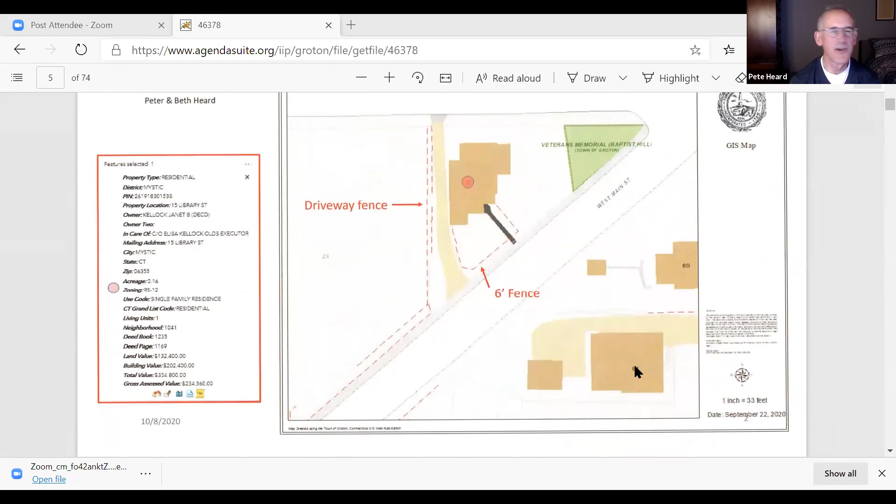What we're looking to do is remove the rotted fence that's along roughly 90 feet on the west side of the driveway along the property edge. The purpose is to access and remove the vegetation that's growing between the fence and the concrete wall that runs along the property line. I'm guessing the fence is 25, 30 years old. I don't believe it has any historical significance, and it's largely hidden from public view. It's perpendicular to both Route 1 and Library Street. As I said, behind the fence is a concrete wall that you probably all know about. It separates our property from the house that's being renovated next door.

And in the spring, what we'll want to do is something there, we're not quite sure what. We'll look for your guidance on that, but we're going to regrade the driveway a little bit, add some gravel to level the ditch that's behind the fence, between the fence and the concrete wall. We may put in a new fence there, but we want a few winter months to visualize what we're going to do there in the future. Again, the main purpose now is to get the vegetation down. It's overgrowing the house, filling the gutters and so forth. And the fence is rotted anyway, I think it needs to come down regardless.

The other part of the project is to remove the fence that runs partially along the driveway towards Route 1, then turns the corner and goes down Route 1 about 30, 35 feet or so. It's a 6-foot fence, a little bit newer, certainly in better condition. But I think at 6 feet, it's out of character for the neighborhood. We want to take that down, plant arborvitaes along Route 1, and possibly around the corner lining the driveway. Again, not quite sure what we're going to do there. We understand Route 1 is scheduled to be redone in 2021 or 22, some trees being taken down and the Jersey barriers there. So we're not sure if that's going to come onto the sidewalk property, but we'll come back to you if we put up a new fence there, a 4-foot fence along Route 1. So that's it in a nutshell, glad to answer questions.

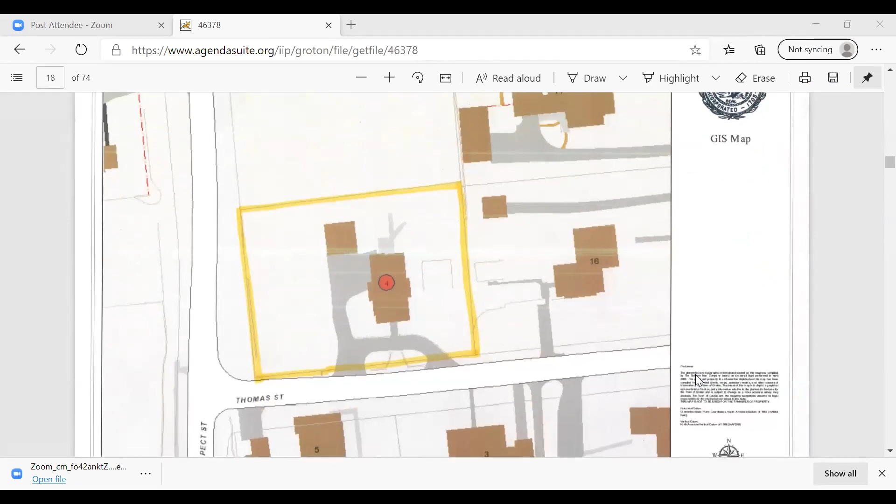Can you hear me? Yes, okay. We want to replace 21 windows in the front of the house and the side of the house. The back was done in 2005 when they put an addition on the house, and the original windows are the windows we want to replace. We want to put in replacement windows because we don't want to tear any of the trim inside the house apart, because we had a problem when we did some flooring.

They broke a piece of trim and you couldn't replace it, so we just want to put replacement windows in. They're solid wood windows with aluminum clad, the exact same windows as the back of the house. They're going to take the 21 windows off, take them out, put the new windows in, caulk, and seal everything.

Now, do you have storm windows on there? Yes, they're aluminum storm windows, which will be disposed of. You're going to remove those. Yes, so you will only see the windows - there will not be any storm windows whatsoever, because all of the windows are double paned. Right, they're thermal pane.

And what's the muntin situation of those windows? Are they 1/1s? 2/1s and 1/1s, it says, right? Oh, it's 2 on the top, 1 on the bottom - exactly what is the rest of the house. So wherever you're replacing a window, you're replacing it with a like window? The same, it'll look exactly the same. Okay.

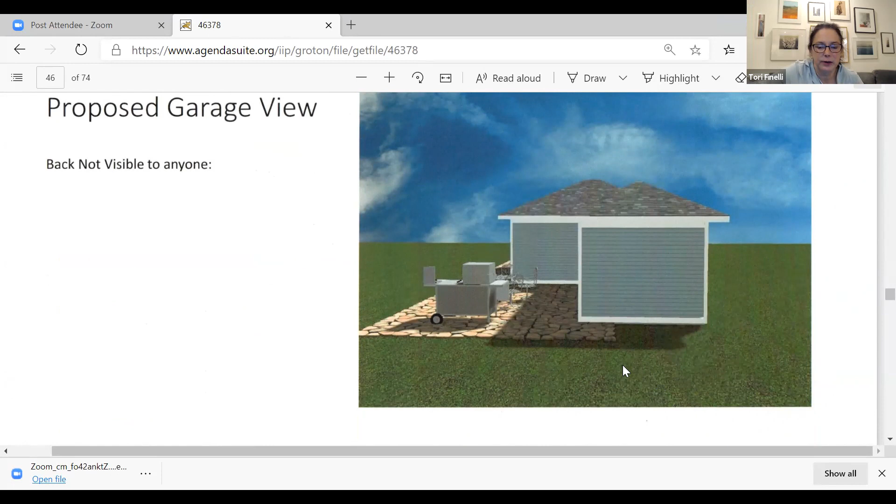This isn't visible to anybody, correct? Well, yeah, because my neighbor's garage is right up against it - you could walk, there's like 3 feet in between. But there's no change to that anyway, no windows or. And it's not visible from a public way anywhere either, right? It's not visible from the street.

And that's - sorry, my internet's not too good. That's one of them.

So we're doing the 2/2, what it's called - 2 wide, 1 high, which is what the rest of the house has and what there is on the garage right now. But it'll be...

It did sign out. It didn't - what did it do? What do I do? What did I do with the Chinese food?

So it won't be an actual divided light, it's simulated divided light, but it's on the inside and outside. So it'll look like the existing window right there - shut the volume - as will the door. Can't hear you. Does it not hear you? I can hear somebody's TV. Please shut the volume down, please.

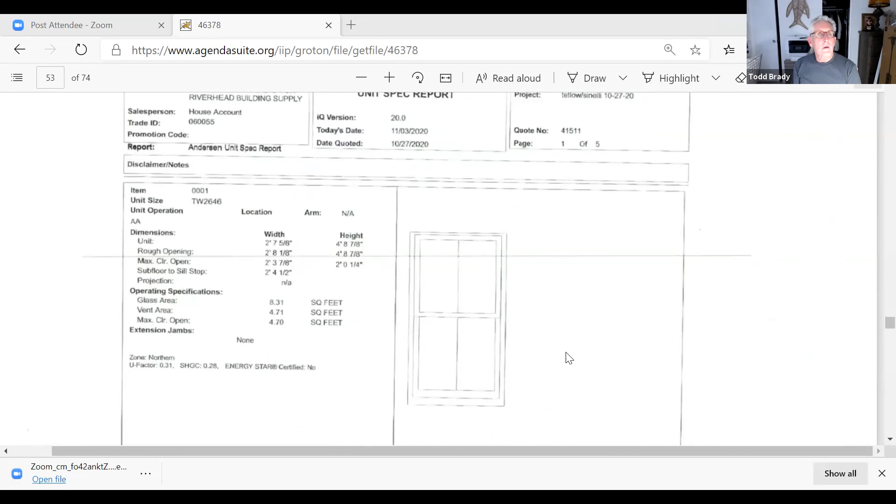It's not within our jurisdiction, but I'm just curious - if you're gonna make it living space, doesn't it have to be insulated and everything? Yeah, they're gonna do that on the inside. Because right now it's just open wood on the inside. So they're gonna insulate it and put - what, drywall? Drywall, yeah, okay.

So you're not doing anything to the siding? Doing the faux garage doors - no, that's all just the wood siding, which will stay the same. In the back where we're raising it, we're just gonna copy the same wood siding and paint it the same. We painted it since we've moved in, so it'll all match. And then the roof is just shingle, not old, so that's easy to match.

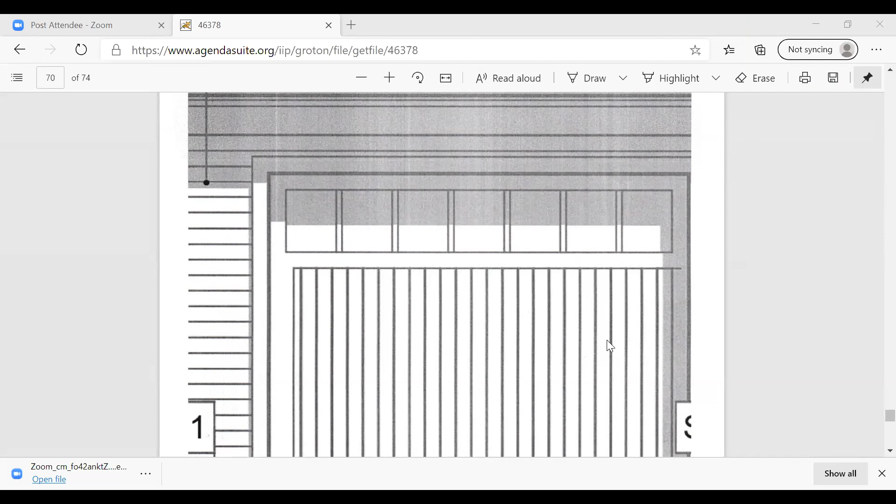Was this for pre-application? This is for Broadway. It's going to be Station 1 Hotel. Wrong side of the river. Oh, I think you're here for that house. Yeah, oh, for the one behind it. Yes, for Perry Lorenz's house. Sorry, my apologies, right on Fort Rachel Place. Yes, correct. All right, we'll get back to you if Mr. Camo gets here.

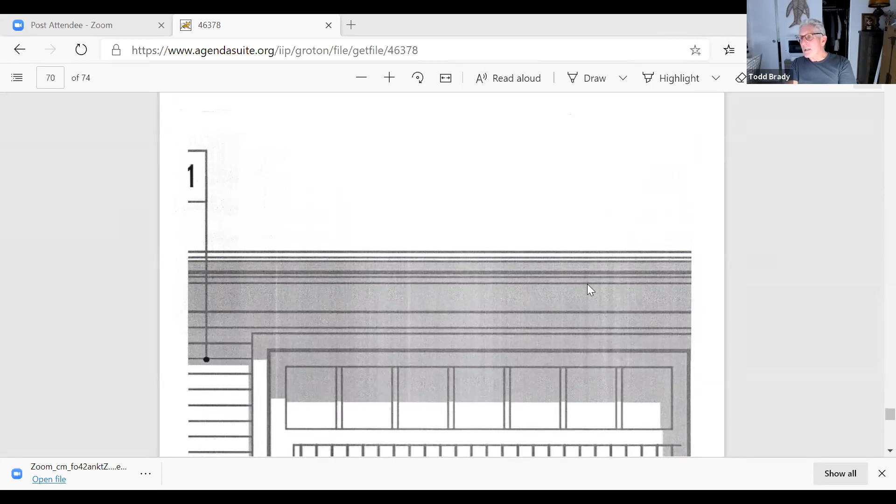In the meantime, do we have to vote on this, or is this just a submission? I think it was just a submission because you guys agreed as long as he submitted for you to review briefly. Okay, so this is the garage door he's gonna use.

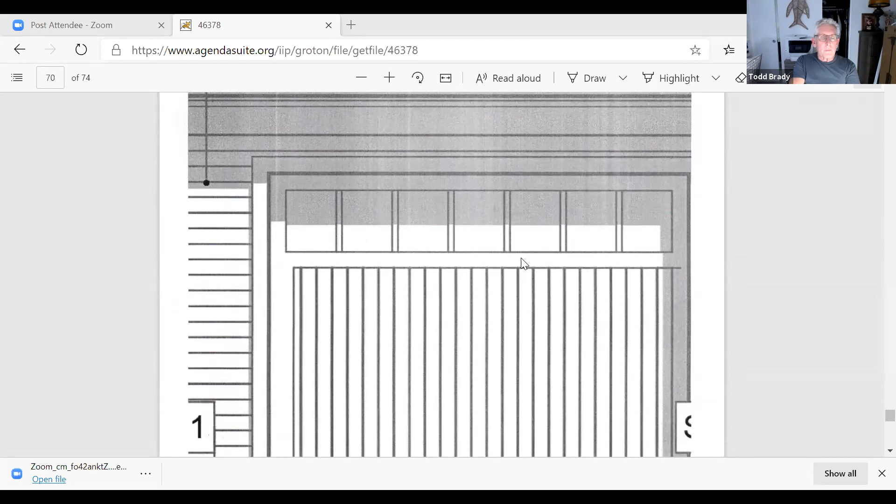Is there anything below that, Peter? Right there. What is that? And that's it, it's just showing the grid style. Is that the door he's using, or is that the door he's using? Yeah, those are two different doors. That's why I'm confused.

And the substituted garage door style. So the substituted one is this one, the one with the grid style. That's what he's going to use, Peter. Right, that's the substituted one. The one above is the one that we approved before that had glass. So this is just a solid door. Okay, so I guess we just attach that to the file. I think that was a formality where somebody said you should just make sure you submit it. You guys were approving it, but you just wanted to see it in the packet.

I still don't see Mark Como out there. Can we go on to new business while we're waiting, Peter?

Might as well. So we were working on changing the application to make it a little bit more formal with the procedural aspect of it, so we don't run into the problems we were running into. This was the new format we were going to be using for the application. We wanted to bring this up for the commission to take a look at.

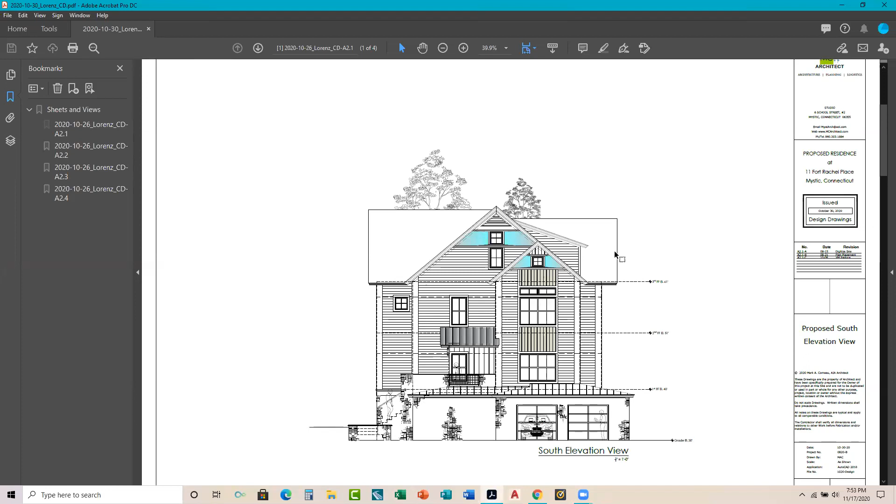So I had presented elevations in CAD of the proposed property, and I had expressed how we were using a very clean way of expressing very typical federal kind of details and modern farmhouse architecture on this structure. It navigates over four different levels of plane to get from the lower area at approximately elevation 28 up to elevation 55. In listening to Eric, I know he had concerns, which I believe were just about the nature of the CAD drawings - wide pilaster corners, typical traditional roof, metal roofing, standing seam metal, clapboard siding, double hung windows. I don't know where we can really go too wrong with those elements.

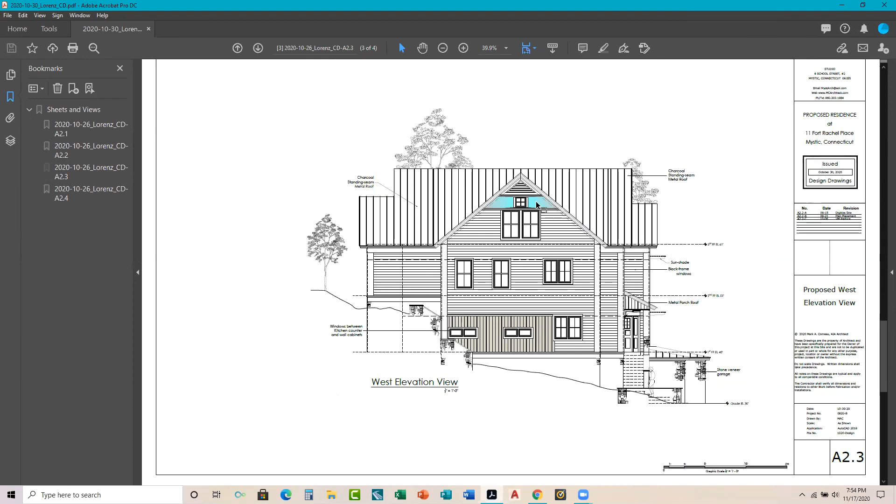But we're going to use a wider 15-inch, very plain pilastered corner. We could decorate it with moldings and all of that, but that's what they would have done 100 years ago. I'm looking to do more of an abstraction of the elements that truly are the creator of the forms

of Mystic, and move the dialogue a little further. And then within that, we've got the expressions of the fenestration, double hung windows, a charcoal frame, as you see on the Bravo building.

But I've broken it up in between them with a vertical wide plank shiplap, a plowed groove instead. It's a subtle detail that, if you know what shiplap is, only shows in a very thin shadow. But here I drafted it, and it shows up like a Yankee pinstripe, where you'd hardly ever see that. You'd probably hardly know the difference between this surface and this surface. Only when the sun hits it a certain way will you see any of the shadows communicating that.

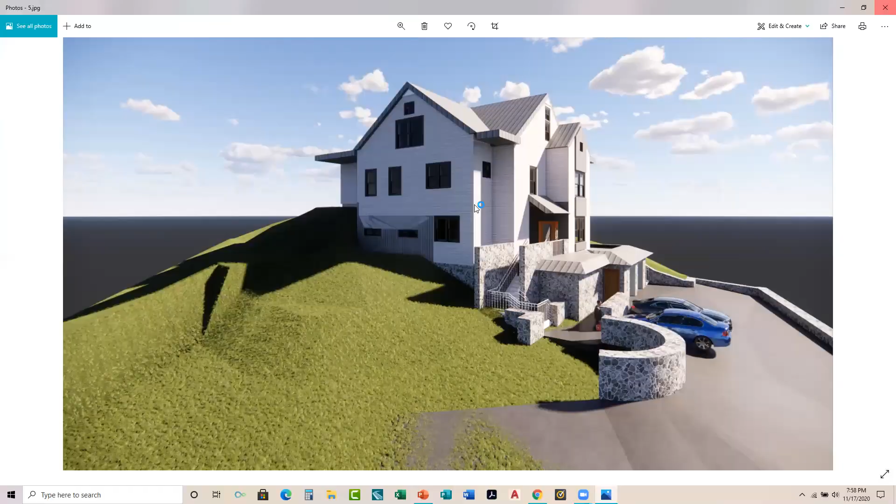This would be from the southeast corner. This green area, it's a very difficult site to model. This actually would drop off and be ledge that goes down to Water Street down here. So where we show this grassy field, it's obviously not there. But in the modeling, you've got to make do with what you do.

When you come in from Fort Rachel Place, you come up the drive and into the garage here, and this is that walkway that's going to make its way up to the main terrace and then up to the upper level terrace here.

The siding would be all white painted clapboard. We'd have this vertical shiplap exposed groove that would be just a little bit of a sandy color, just to accentuate itself a little off the clapboard. And then the charcoal roof, as you can see.

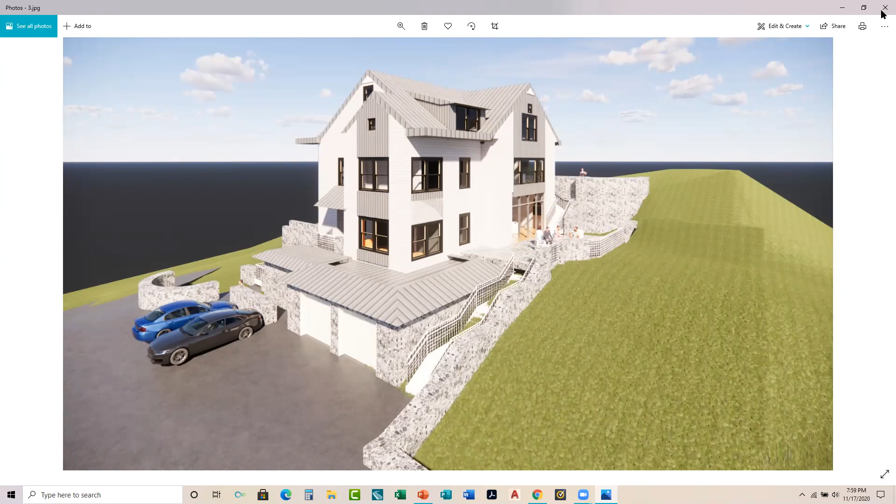And I've got a third one here, more from the east. These windows aren't really right, there's a mullion missing here in this. They're double hung windows, so it's double hung, double hung, double hung, double hung, all double hungs. And then we've got sliding doors here with transoms with muntins above.

So the models are very complicated and take a lot to really put together, but you all are professionals in what you do, and I know you can read into the progress of what you see here.

Mark, I have a question about the roof. Can you go back to that? To the model? Yeah.

So as I'm coming down the standing seam roof here, I'm looking at the gable end and the edge of the roof. It looks... I can't figure out exactly what's going on down here by the eave. Is that a vertical fascia?

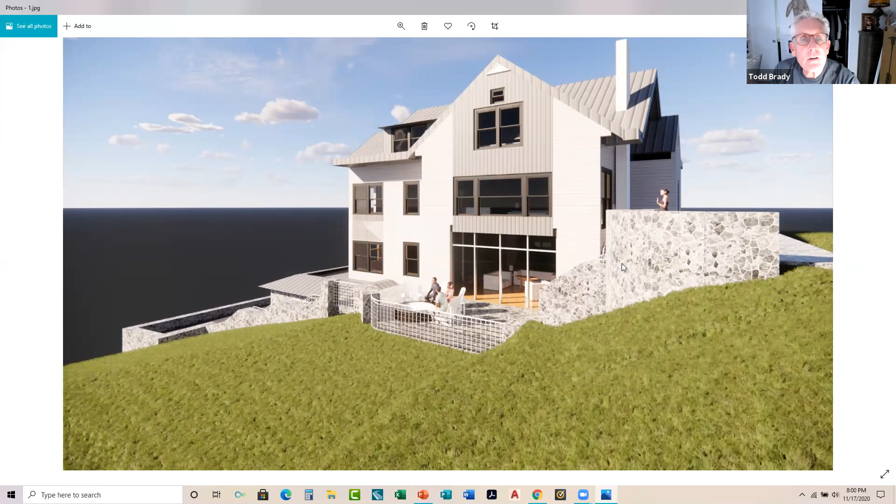No, that's just a function of having to adjust the model. If I go back to this, it's a very typical 8-inch fascia with probably a scotia molding right under the drip. Very typical New England fascia. We have a 20-inch overhang, which gives us a nice shadow line, and then the standing seam metal roof goes from there.

It makes it look like there's a fascia all the way around that's like a foot high. That's just... yep.

You're gonna clean that up if you do those drawings? Oh yeah, the cleaning up is easy. Building the basic model and getting the form there is 92% of the work. 8% is putting the icing on the cake, and that's where we're at right now. So we'll definitely be ready in 2 weeks. But obviously, this rendering you see in front of you wasn't done overnight.

These hand drawings take a while, but I wanted to produce this. I've been doing this for 30 years, and this is really more the texture and expression that this house will have, so I wanted to pay more attention to it. The modeling just simply shows you mass and shadow and context in ways that we can't in 2D.

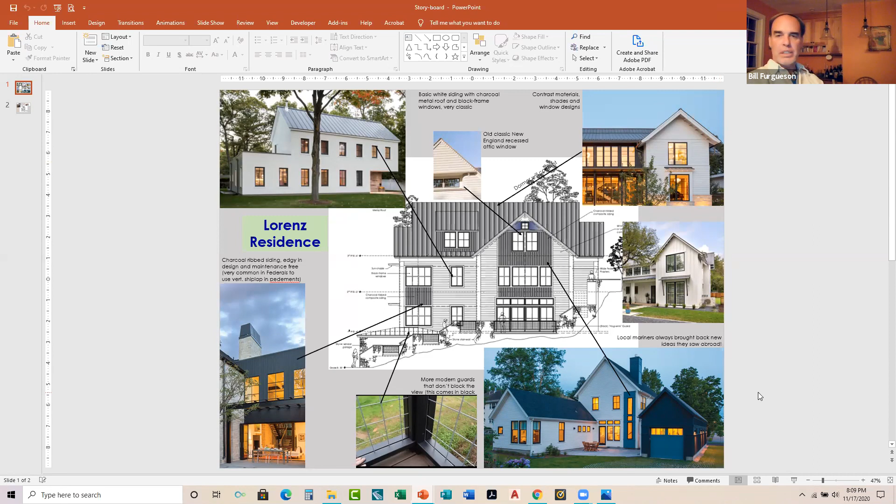One of the issues that came up at the last meeting, Bill, was on the center drawing of the house. Because it's a CAD drawing, it really emphasized and drew out the shiplap, and that's why we asked Mark to do another drawing. No, this picture is, not to sound mean, far worse a presentation because it accentuates the shiplap so much that it detracts from the rest of the house. The most recent drawing you shared, the hand one, is much more convincing, for lack of a better term.

I think the point I'm trying to make, as a member, is that Mystic is extremely important because of the collection and makeup of the homes. If you read what's written about it, the historic district guidebook we're supposed to follow, it's about following and keeping in character with that. This is totally different. I understand Todd's point, I don't necessarily disagree with Todd's point, and I don't not like this house. You allow this, you open the doors, and if you open those doors, you might as well throw the historic district out.

This, you're breaking so many barriers - down to the metal fencing, the metal roof. They're just all materials and things that aren't used and aren't around. And look, I'm advocating for change, I mean obviously I'm doing it myself, but this is just too much for me. I don't know, that's my opinion.

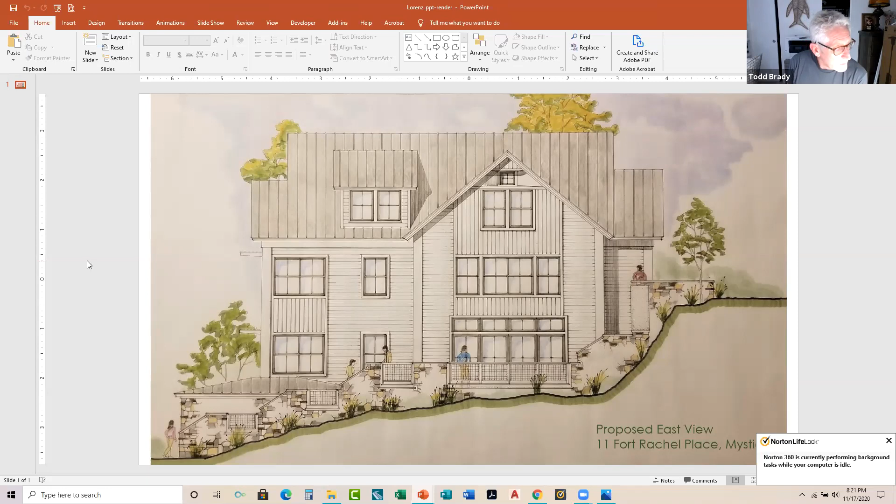I think the deadline is Wednesday, that week. The Wednesday prior to the meeting, I believe, is the deadline. But I would just reconfirm with Tom in the morning on that one. Okay, great. So is there any other business before us tonight?